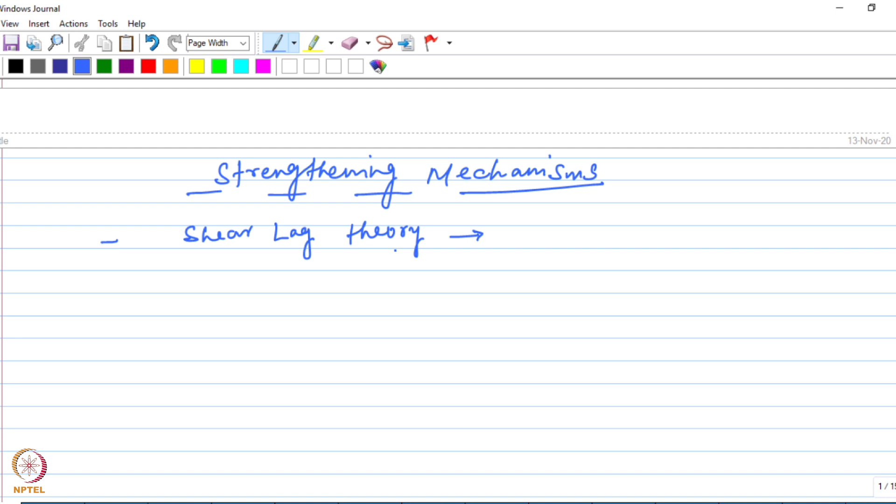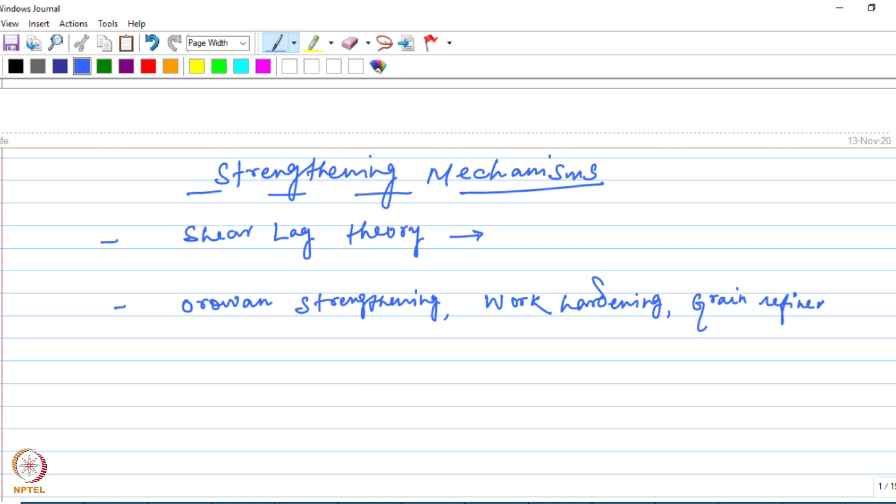In the previous class, we learned about all the strengthening mechanisms of metal matrix composites. We talked about the shear lag model or shear lag theory, which explains the transfer of load to the stronger reinforcement via the interface. Then we discussed dislocation mechanisms such as Orowan strengthening, work hardening, grain refinement strengthening, and strengthening due to mismatch in the thermal expansion coefficient.

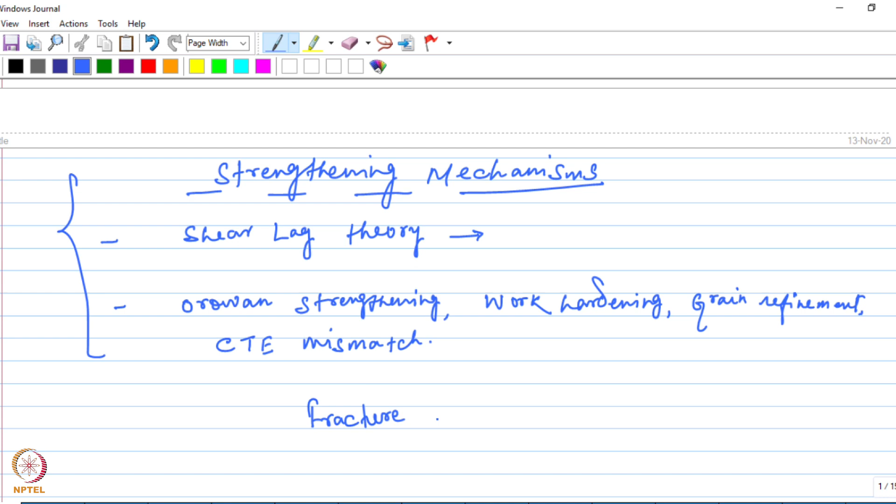All these mechanisms ensure that the strength of a composite is higher compared to the unreinforced matrix. Now that we have learned about the strengthening mechanisms, it is time for us to look at the fracture behavior of MMCs and see how the fracture of the composite differs from the matrix material, and what are the different aspects of fracture. This will be the topic of discussion for this class: fracture of metal matrix composites.

We are going to start with fiber reinforced composites. When you talk about the fracture behavior of a fiber reinforced composite loaded in a particular direction, let's say parallel to the fibers, you also need to consider how the matrix behaves as it is loaded in the presence of the fibers. You need to consider the matrix properties as well, particularly the ductility.

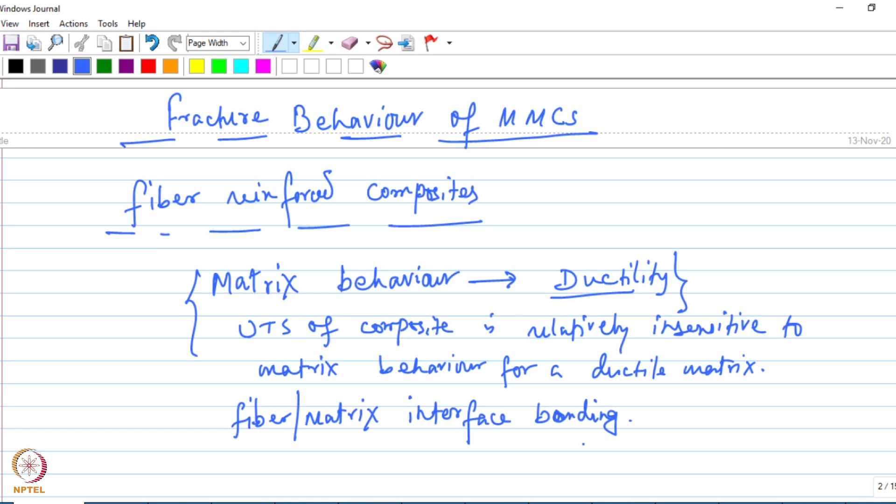So we will make a distinction between two cases with regard to the ductility of the matrix: one when the matrix is quite ductile, and another when it is a stronger matrix with relatively lower ductility. For a ductile matrix, for example pure aluminum matrices, the fibers can fracture before the global yield of the matrix. So before the matrix starts to yield, you can expect the fibers to fracture when the composite is loaded, when the matrix is ductile.

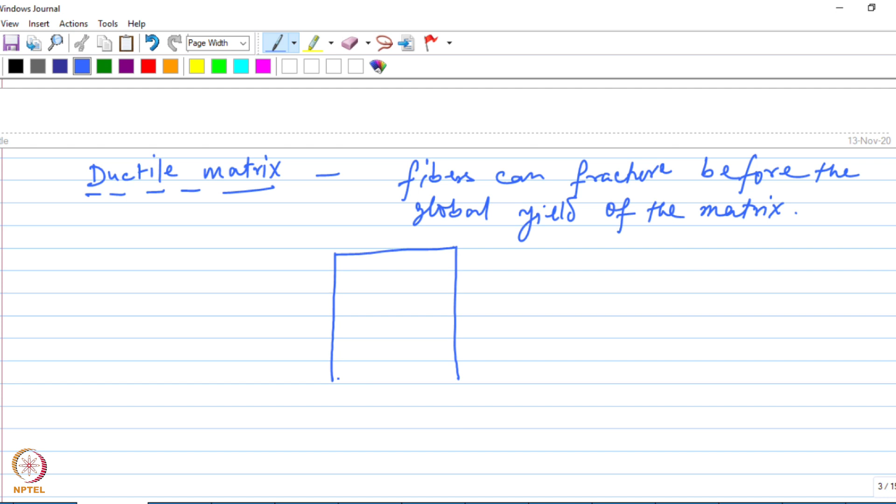Now, once the fibers are broken, the crack will propagate along the composite, and this crack propagation would depend on what kind of interface bonding is there between the fiber and the matrix.

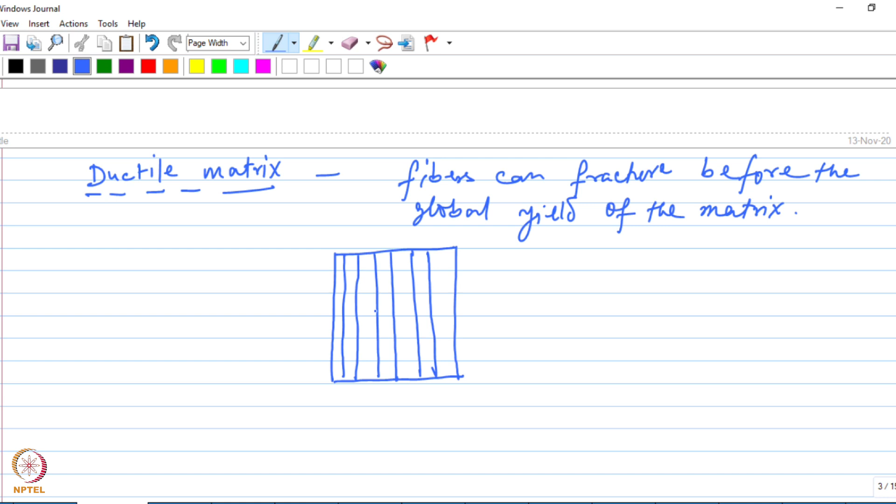Let us consider a fiber reinforced composite like this. The fiber will fracture first, and how this crack will propagate depends on the bonding at the interface. This interface, depending on how it behaves, the propagation of the crack would vary. Again here we can make a distinction between two cases: one when the interface bonding is strong, and the other when the interface is weak.

Once the fibers begin to fail, the local matrix will yield at the broken fiber ends, and this yielding of the matrix will relax the stresses and prevent the crack from propagating to the adjacent fibers. So once matrix yielding starts, it will basically lead to stress relaxation, and this will have a blunting effect on the crack tip - at the broken end of the fiber, it will relax the stress and blunt the crack.

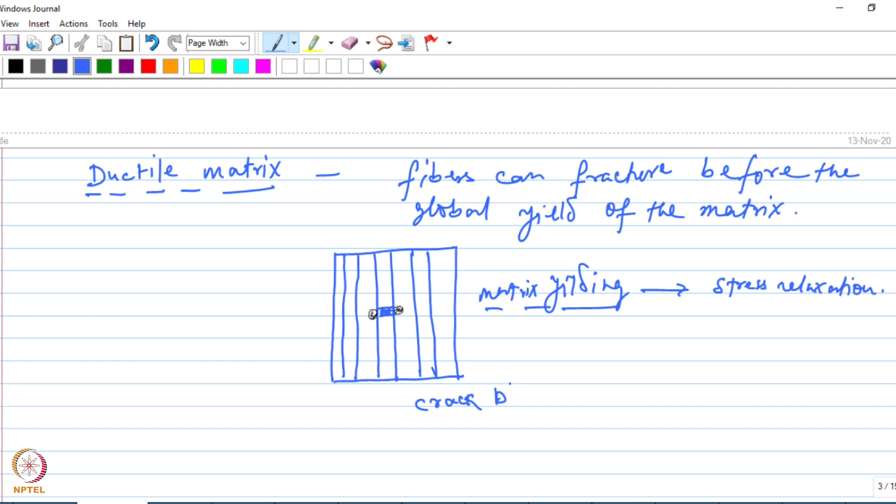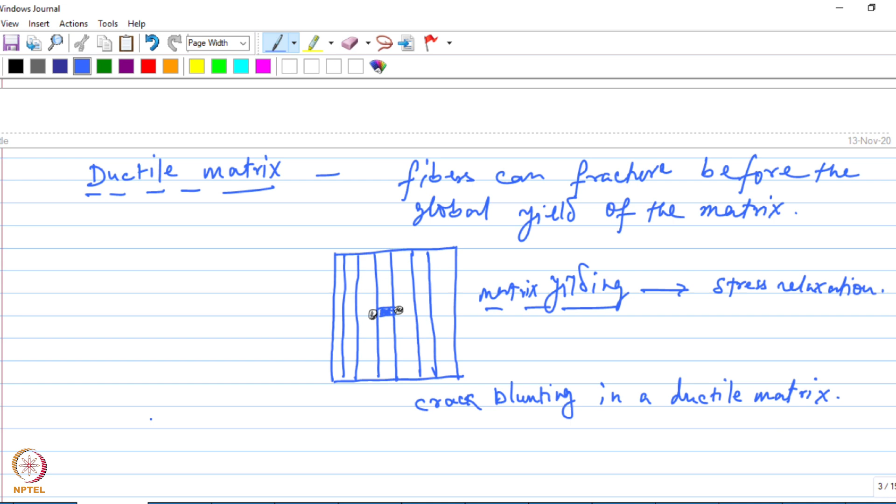So this is one scenario where the matrix is soft and ductile. Now let us move to another case where the ductility is comparatively lower, for brittle matrices.

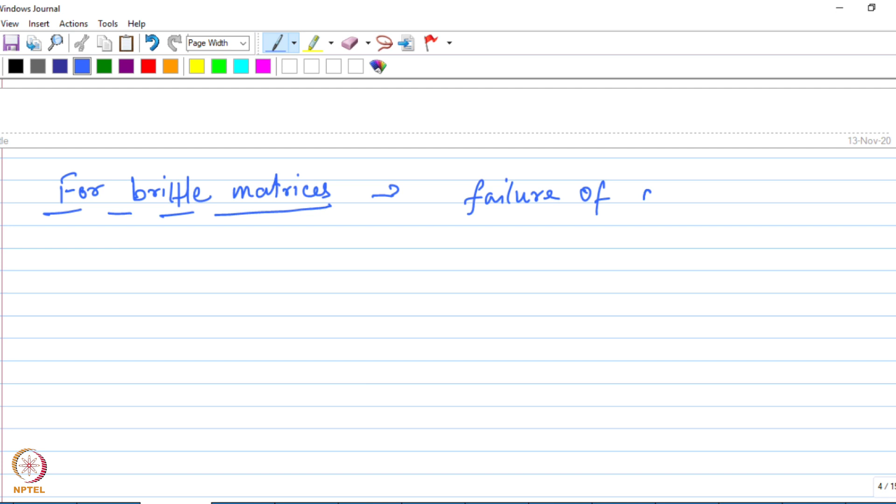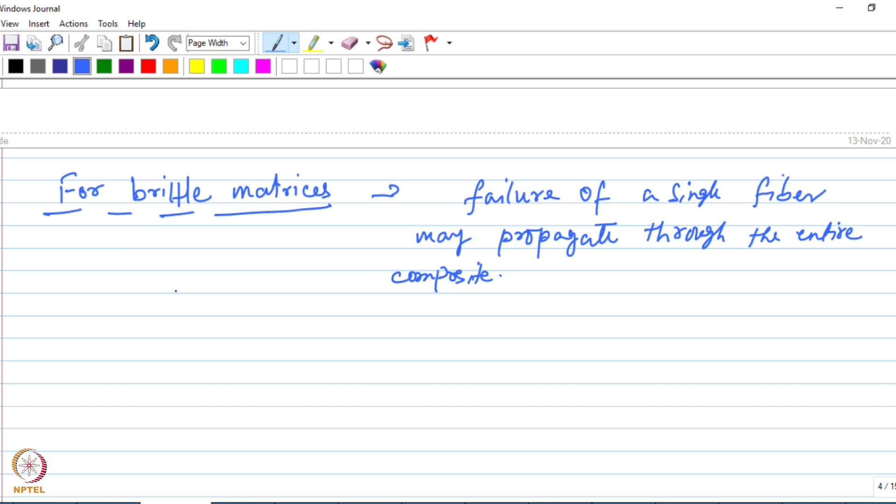The failure of a single fiber may propagate through the entire composite, leading to catastrophic failure. Once the fracture starts in a particular fiber, it will quickly propagate to the adjacent one, and the crack will quickly propagate across the entire composite material. The catastrophic failure can be prevented only when the fiber-matrix interface is weak.

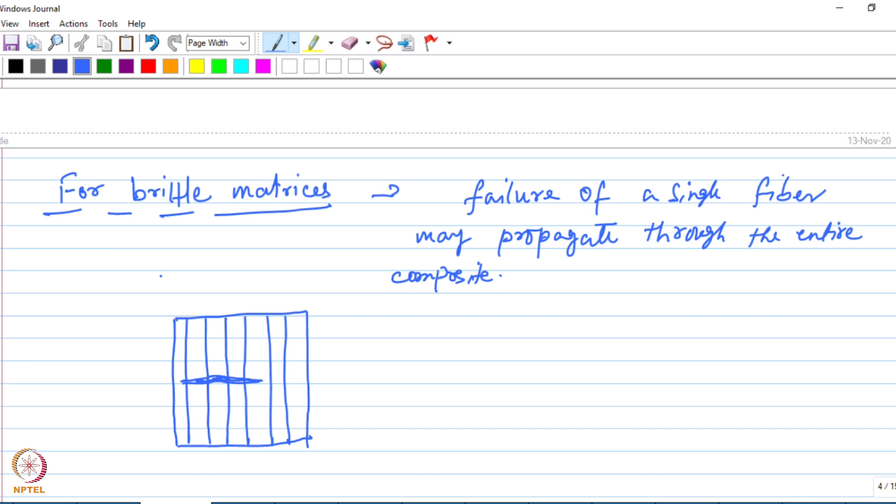So this scenario, if you see in terms of looking at the fibers, once the fracture of a fiber starts, it will propagate to the next one. The catastrophic propagation of the crack can only be prevented if some relaxation is developed at the crack tip. Only when the stresses can be relaxed can this catastrophic propagation be prevented. When the matrix is brittle, that relaxation can only be developed through the interface if it is weak, if the bonding at the interface is weak.

This will relax the fibers and prevent the catastrophic crack growth.

This is also one of the reasons for the anisotropy that you see in fiber reinforced composites, because how this interface behaves from fiber to fiber might change, and it may also differ when you change the loading direction. That is how this interface behavior can lead to anisotropy in fiber reinforced composites.

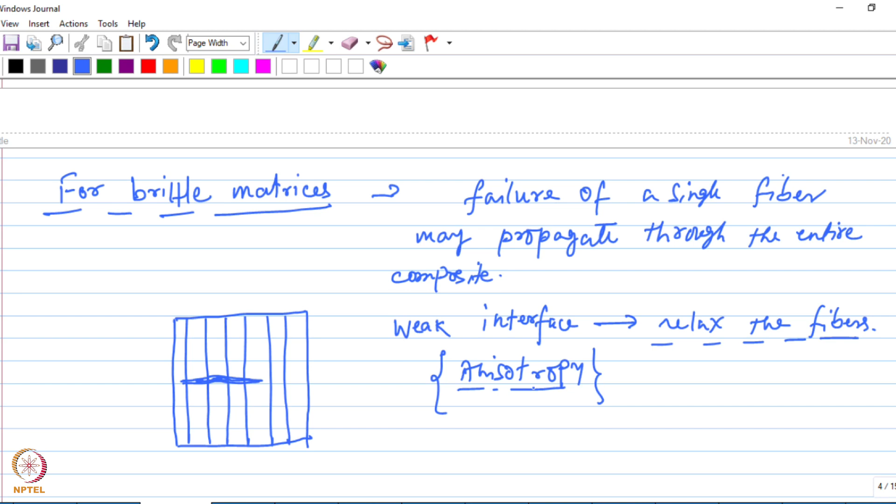So when the interface relaxes due to the weak bonding, it can be represented in this manner. Basically what we are saying is, when the fiber is fractured, it can be relaxed if there is a debonding at the interface, which will lead to crack deflection and prevent catastrophic fracture.

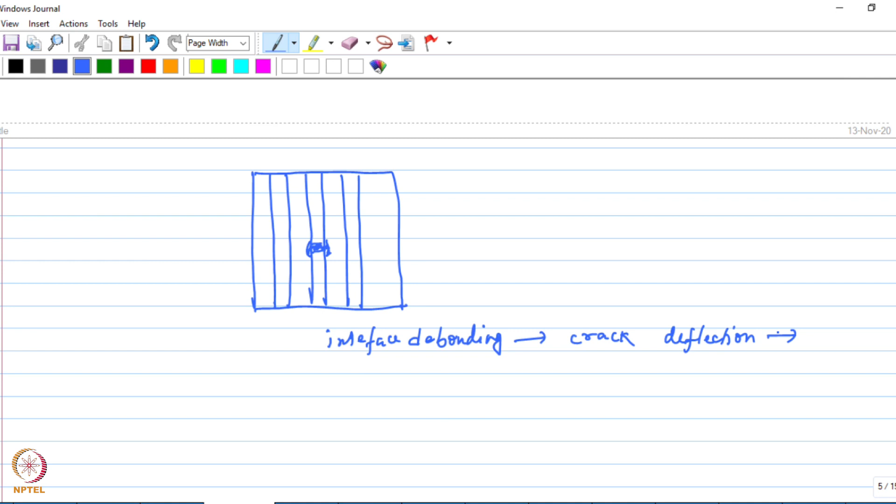Now let us consider the fracture of a single fiber and how that propagates to the adjacent fibers, leading to the complete fracture of the composite.

The load carried by a particular fiber has to be distributed to the adjacent fibers after the fiber fractures, so load redistribution is needed after the fiber fractures. Therefore the load has to be transferred to the adjacent fibers, and then those fibers will carry the load.

As you continue the deformation of the composite, these fibers will now start to break, the fibers which now carry the load. As you continue to increase the load on the composite material, the fibers will break one by one as the load is redistributed and transferred to the adjacent fibers. This sequential fracture of the fibers will depend on the degree of coupling between the fibers and the matrix.

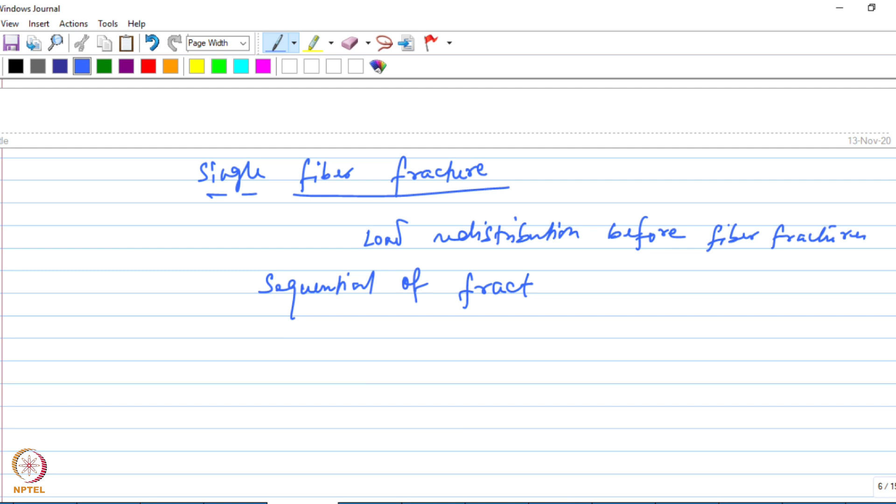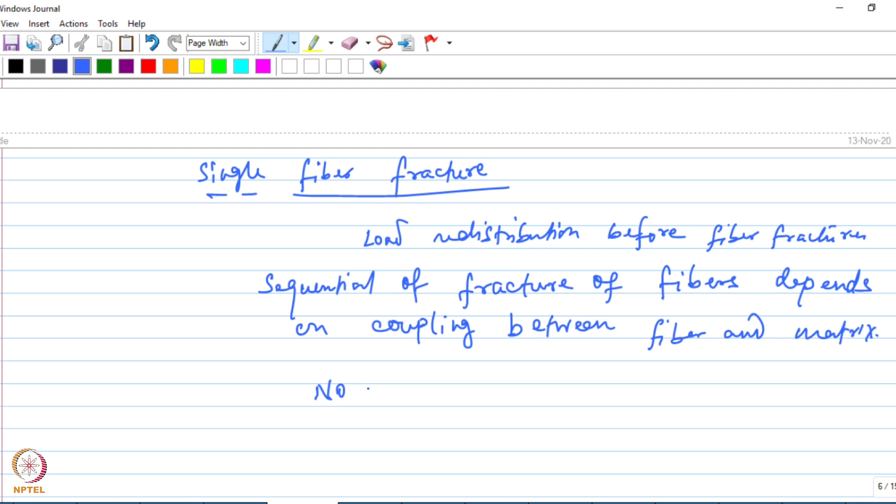This again boils down to the bonding between the fibers and the matrix. It is not difficult to understand that when there is no coupling, the composite under load will behave like a bundle of fibers, because the matrix has no role to play since there is no coupling between the fibers and the matrix.

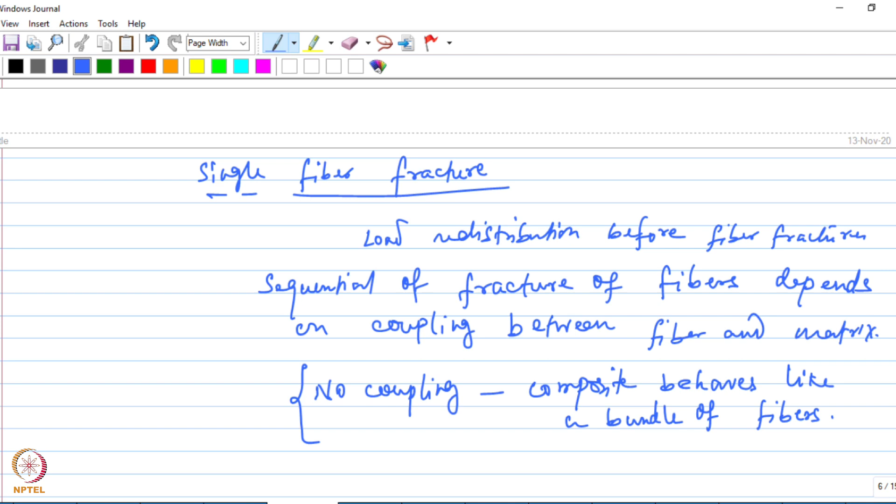On the other hand, when there is a strong coupling, the deformation will take place in a manner as discussed before, depending on different parameters of the matrix material and also the interface bonding, it will deform in a particular manner as we discussed.

Now let us consider the growth of large cracks during tensile loading in a direction parallel to the fibers.

Okay, so let's say this is a fiber reinforced composite which is loaded in tension in a direction parallel to the fibers, right?

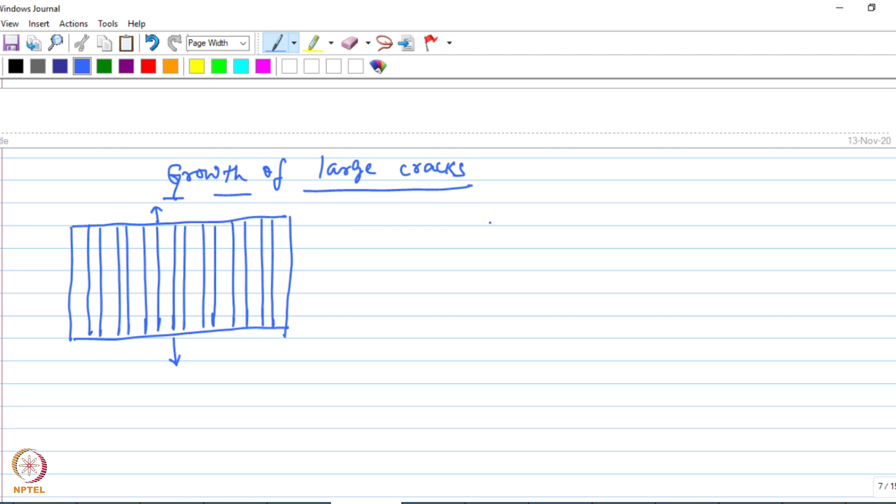And now we need to understand the growth of large cracks as to how it happens in this case. So in this case, for the crack to propagate, failure must occur in both the fibers as well as the matrix.

So you have a crack in the fibers and you also have a matrix crack. The matrix crack propagates behind the fiber crack front. That means the matrix crack will follow this fiber crack, right? So if this is the crack in the matrix and this is the crack in the fiber, this is how the matrix crack will be with respect to the crack in the fiber. So the propagation occurs in that manner. The matrix crack propagates behind the fiber crack front, so here you can see the crack front is planar.

And this occurs when the interfacial bonding is strong.

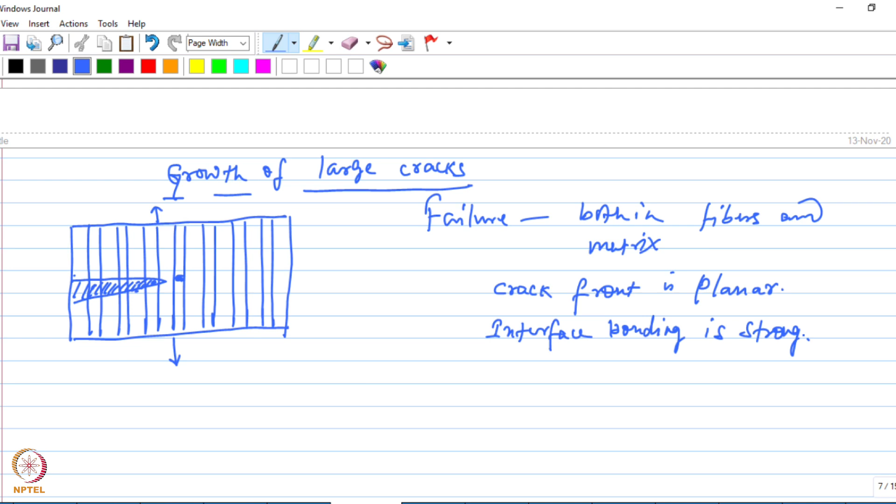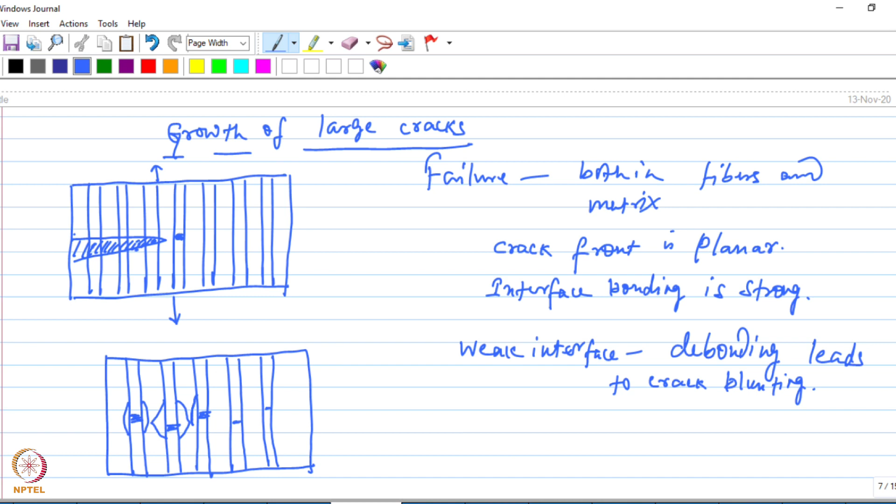On the other hand, if the interface is weak, then debonding at the interface will lead to crack blunting, as we have seen before. So due to the weak interface, there is debonding at the interface, which will lead to relaxation and blunting of the crack. So there is a debonding at the interface, which leads to crack relaxation, right?

Or crack blunting. And in this case, you can see that the matrix crack and the crack in the fiber are not really in the same plane. So therefore, here the fracture is non-planar, unlike the previous case where it was a planar fracture or planar crack front. But in this case, the matrix crack and the fiber crack are not necessarily in the same plane, and therefore it is a non-planar type of fracture.

So to quickly summarize this fracture behavior of fiber reinforced composites, we can say that when you talk about the entire fracture of the composite material, you need to take into account the matrix behavior and the fiber matrix interface. Depending on that, the crack will behave or propagate differently, and matrix properties such as the ductility of the matrix will have a role to play on the propagation of the crack.

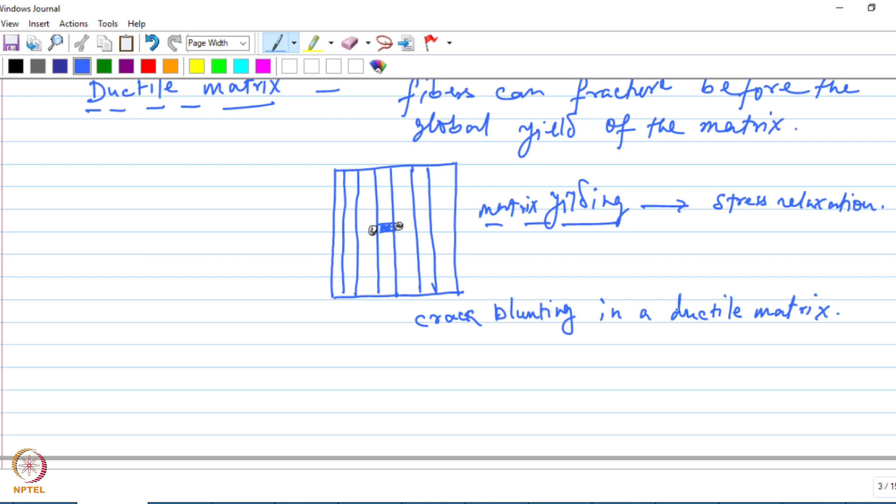When it is a ductile matrix, the yielding of the matrix material at the broken fiber ends leads to stress relaxation, and that will prevent the propagation of the crack.

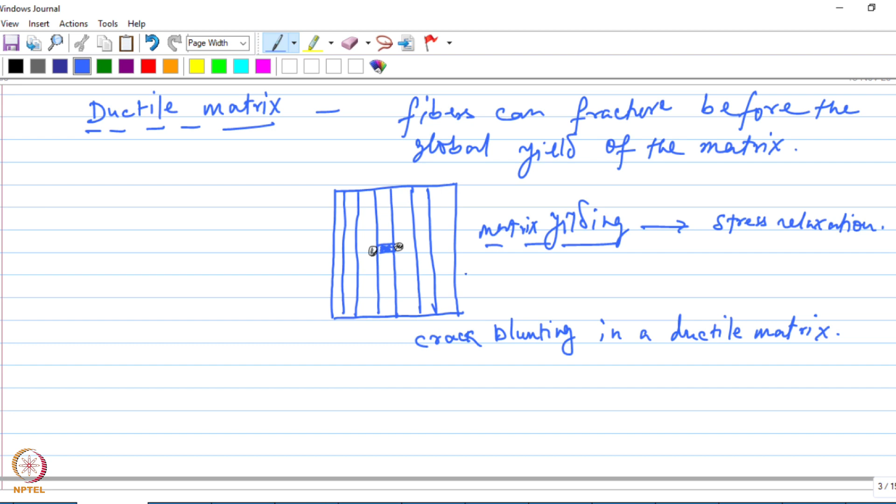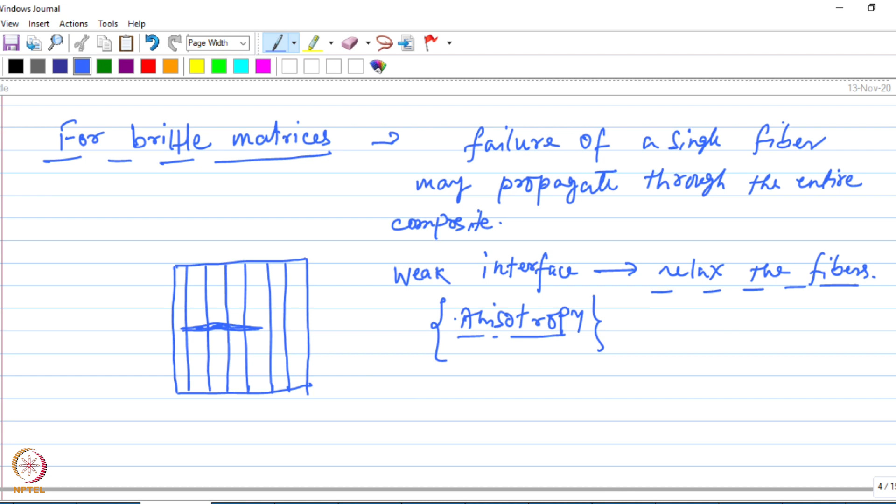On the other hand, when it is a brittle matrix, the crack can propagate from one fiber to the adjacent fiber, and the catastrophic failure can only be prevented if there is a weak interface which leads to some kind of deflection of the crack due to the debonding at the interface.

And then we talked about the fracture of single fibers as to how the fibers fail one by one when the composite is loaded, and this sequential fracture of fibers depends on the coupling between the fiber and the matrix. If there is no coupling, the entire composite will behave like a bundle of fibers, and on the other hand, when there is a strong coupling, the fracture behavior would depend on the interface bonding.

And then we talked about growth of a large crack under a tensile load in the fiber direction. So here again, depending on the interface bonding, the fracture can be planar or non-planar. When the bonding is strong, it will be planar. The matrix crack will follow the fiber crack, and these two cracks will be in the same plane.

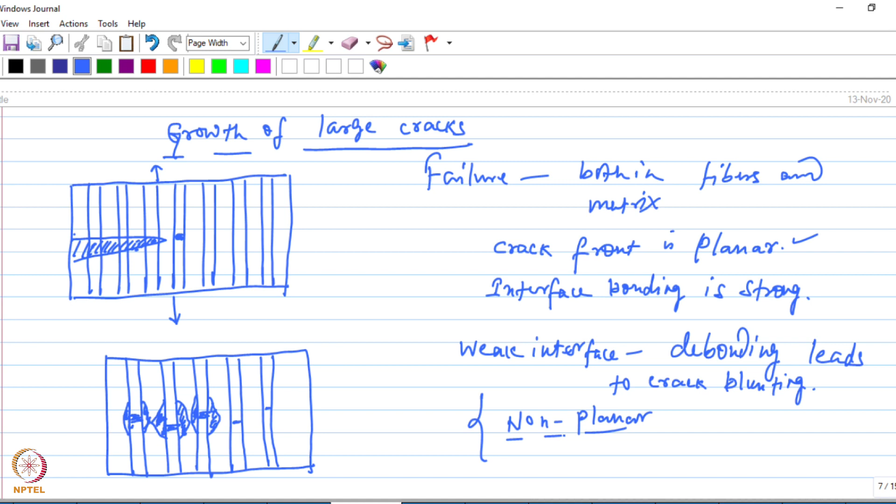On the other hand, if it is a weak interface, debonding leads to crack blunting effects, and here the fracture of the fiber and the matrix are not necessarily in the same plane, so this will be a non-planar type of fracture. And with that, we come to the end of this lecture. Thank you for watching.